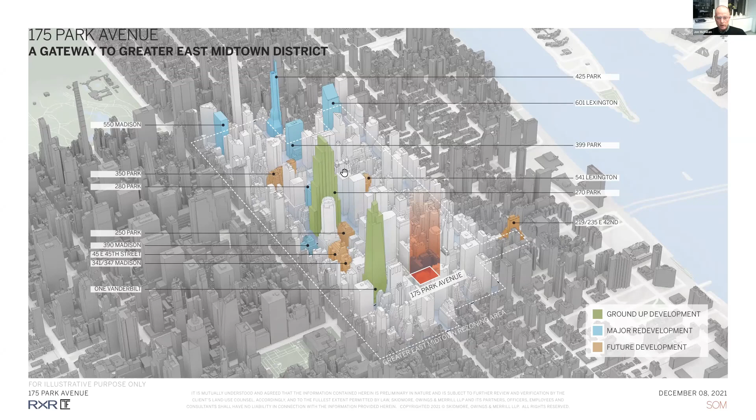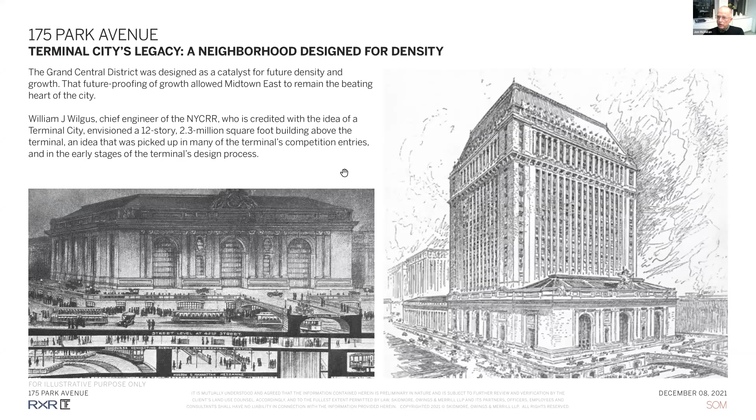So our site is next to Grand Central Terminal, just on the right, of course. Grand Central was always seen as kind of the center of Manhattan's premier office district, a place appropriate for density. And the reason for that, of course, is that it has so much infrastructure built into it on many, many different levels. You can see the viaduct that surrounds Grand Central in both of these images. Then the street level, and then several levels below grade of commuter and subway rail lines. All of that stuff extends underneath our site next door. So we had to kind of deal with all of that from the very beginning.

The site, as you can see, go ahead, Kim. On the left, the site sits at the confluence of both regional commuter rail lines and the city's subway system. So the Long Island Railroad and Metro North coming in from upstate and Connecticut come right into this site and join together with the city's several subway lines, literally underneath our site. And on the right, you can see our site in orange. And then in the middle of that image are the black and white train lines coming in from Connecticut and upstate New York.

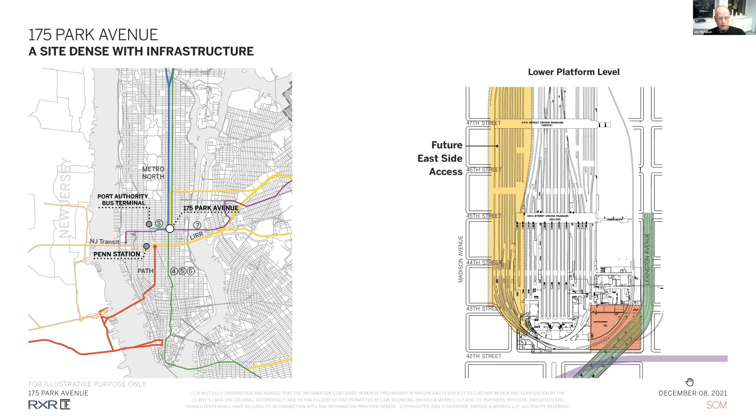Then the yellow lines, these are the new Long Island Railroad lines that are being brought in through East Side Access. And then the green is the 4/5/6 subway line that transitions from Lexington over to Park Avenue, literally under our site, and the station is on that diagonal underneath our site. And then the last thing is you can see that semicircular turnaround rail line is also still in operation for Metro North. So these are all the things that we had to dance around in placing this building on the site. Next.

So this is the site today, the Grand Hyatt Hotel. It was Donald Trump's first project in New York, about 1979, 80, and he acquired the old Commodore Hotel and just sort of slapped a glass skin on it. It's essentially a big H shape that sits on several levels of ballrooms and that sort of thing. Next slide, Kim.

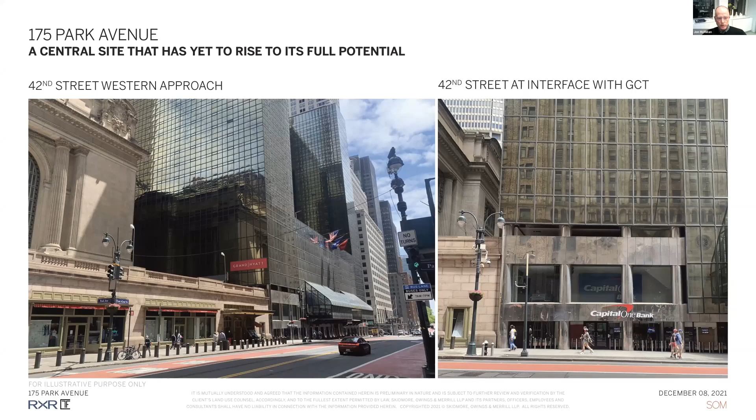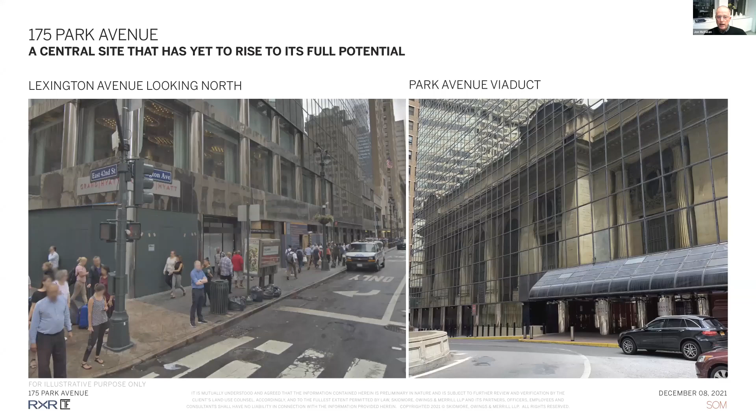It's built out to the property line, no public realm, very much crowds the public realm around the building, as well as all the landmarks that this site is adjacent to. Next slide. So you can see that it's very crowded on all sides of it. On the left is Lexington Avenue. On the right is the viaduct that separates the site at the upper level from Grand Central Terminal. Next slide, Kim.

So this is a scenario of the building. It's about 2 million square feet of zoning footage, much more gross square footage, and about a 500-room hotel that sits at the top of the office building, which is a pretty unusual format for New York City. And then you can see the building terraces back so that we're able to create floor plates of different sizes on each level. Each one of those setbacks is outdoor public space.

And then all of this sits on several levels of public realm and transit improvements at the base. And then you can see the way the building tapers in at the base. That has a lot to do with the structural system that Kim is going to explain, but it also presents the opportunity to create the public realm that you'll see. Next.

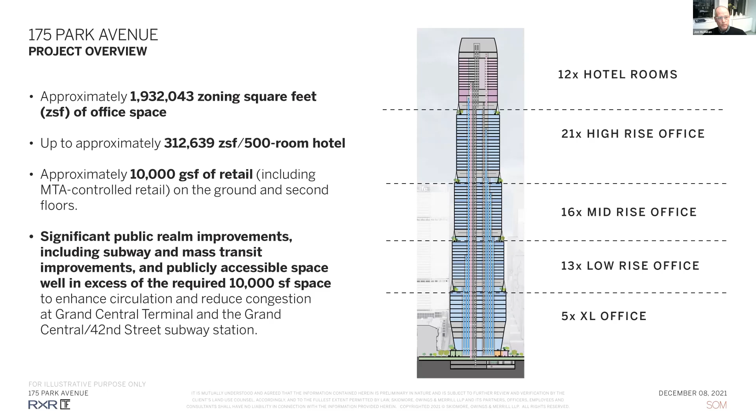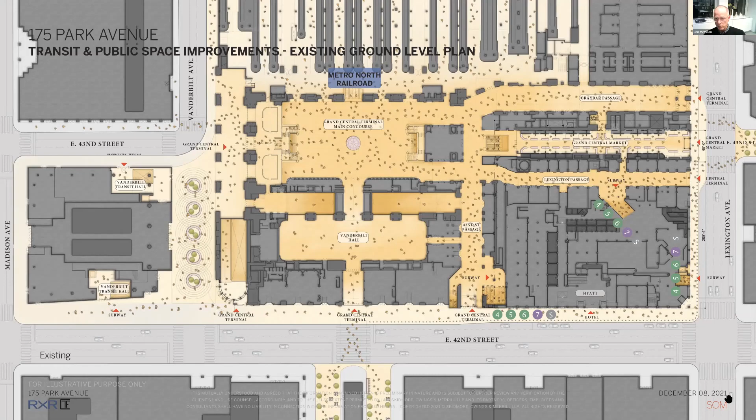Next slide, you can see the ground plane and how we are completely plugged into Grand Central. So that's Grand Central in the middle of the image. Our site is on the right side, and then you can see One Vanderbilt over on the left-hand side, separated by a new public space that's just been opened. But unlike One Vanderbilt, we are plugged into Grand Central. There's no separation between us and the terminal, and many of its circulation corridors literally come through our site, like the Lexington Passage, and then all three of the major entrances into the subway station below cut into our site. So we've been working with all of those.

And by the way, that's such a fundamental part of the project that as we went through the public approval process that we're just finishing here, people really enjoyed understanding the engineering challenges of this site and how that expressed itself in the architecture of the building. And I think that's one of the reasons why we had good success in the public approval process, because people just got what this building was about and enjoyed understanding it.

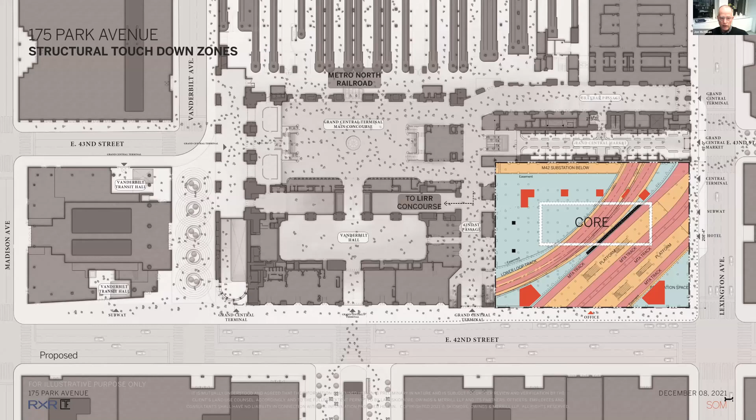Next. So this is the proposed ground floor of the building. You can see all along the left-hand side of our site, we've created a new transit hall that is adjacent to that crowded 42nd Street passageway I showed you earlier. That transit hall leads you into a new at-grade foyer for the subway station below. All the turnstiles that are now on the mezzanine below, clogging up circulation space, have now been brought up to grade. There's a new entrance into this subway station directly from 42nd Street.

And then we're completely rebuilding the Lexington passageway where it is today, but at a much taller scale. And then we're adding a completely new subway entrance, what's called the R239, that is on axis with that subway station below, that's all turned at a 45-degree angle to the site. So that very much improves the legibility, because that subway station entrance is now in line with the station below. So it helps you to understand it better when you get down below.

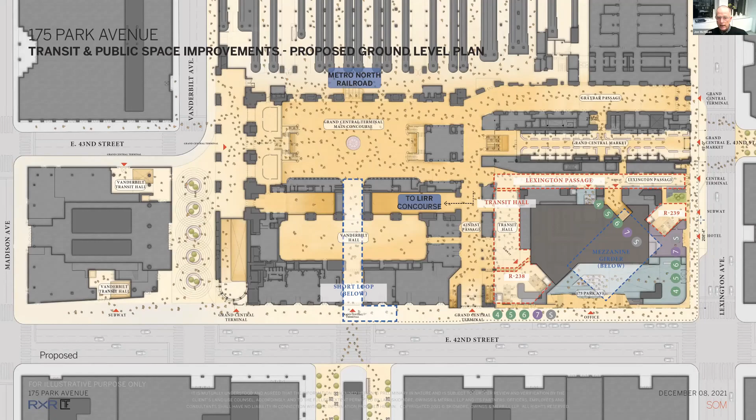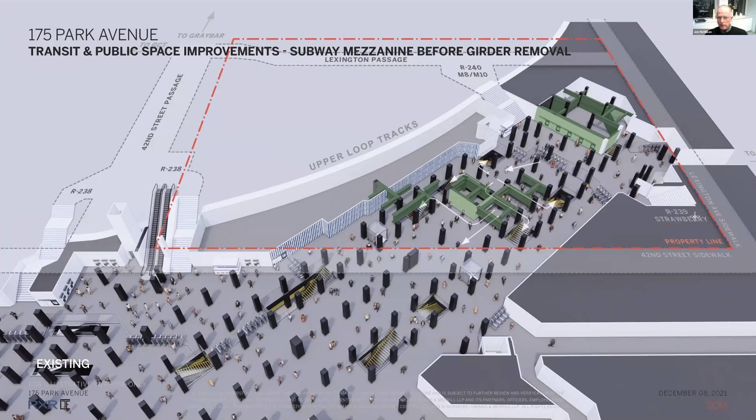And then the next slide shows you the improvements below grade. So now we're at the mezzanine level. Site is still outlined in red, and all of the green stuff here is structural girders holding up the old Commodore Hotel. And because the subway station is built on a different grid than the building, these are all transferring the structure from one grid to the other. We are going to be able to remove all of that; all of this is causing congestion and chaos in the subway station. People can't find the staircases. They don't know where they're going. So we're able to lift all that green stuff out of there. We're also able to remove all of the turnstiles that were clogging congestion before.

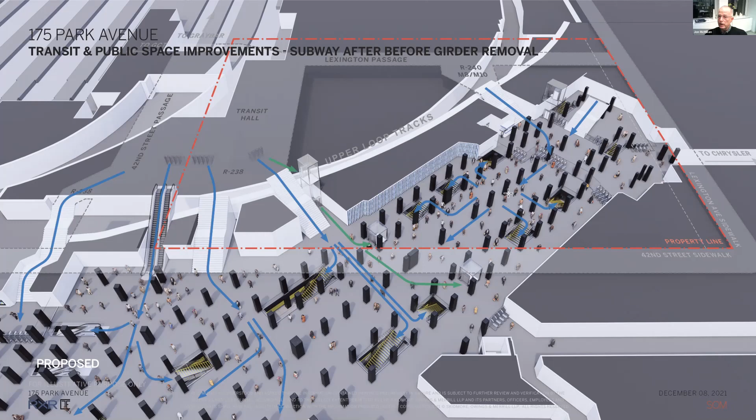And you can see where this new subway entrance is coming down with the green line. That's a new staircase, new elevator, taking people into the middle of the station, so they're now evenly distributed throughout all of those staircases. And then off to the right is the new staircase at the end of the axis of the station, taking people up to Lexington Avenue, also bringing daylight. Both of these entrances are now bringing daylight down into the mezzanine level.

Next. And then we reached off the site to make improvements, and we found a way to make use of abandoned rail tracks and some old storage room, so that we were able to create a direct connection from the Metro North line and from the new East Side Access line into the mezzanine level of the subway station. Right now all of these people have to go up into the terminal and then come back down through those crowded subway entrances. So we're going to be able to take about 4,000 people per rush hour out of those subway entrances and bring them directly from the regional rail lines into the subway system.

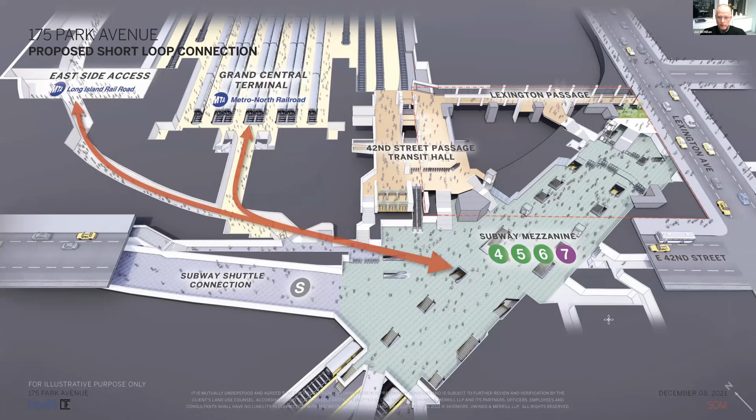Next. So here is a view of the transit hall that we're creating. We do have the opportunity to introduce skylights that will bring natural light into the transit hall, and we've been able to align those skylights in a way so that they will open up architectural features of the eastern facade of Grand Central Terminal.

One of the controversial things that we've dealt with as we went through the public approval process was whether or not this wall between our transit hall and the 42nd Street passageway should be completely open so that the two spaces are joined, or should we preserve the regular entrances that Grand Central has and maintain the distinctiveness of the historic 42nd Street passageway. And the historians seem to come down on the side of maintaining the distinction of the 42nd Street passageway. So that gave rise to this rhythm of entrances that are aligned with other rooms and other entrances like Vanderbilt Hall within Grand Central Terminal. Next.

So here is a cross-section through that transit hall, and because we are pulling our building back from the property line, we are able to create this open space around the site, and that's where this section is taken, so that we now are able to pop up these skylights, create views of the eastern facade of Grand Central Terminal, and introduce this new public realm at an elevated level that Kim and Adam are going to take you through a little later.

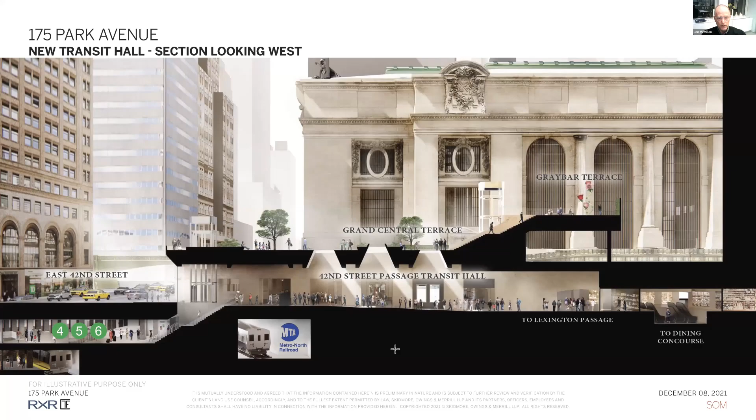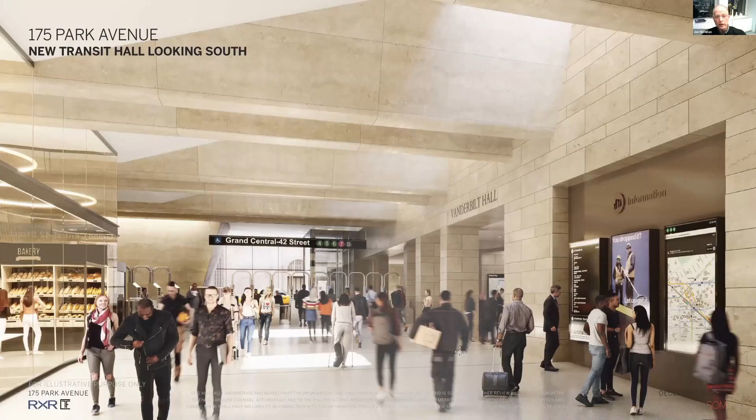Now we are in the transit hall looking south towards 42nd Street. So we're bringing light in through this new opening onto 42nd Street, and you can see all the turnstiles have been brought up from the mezzanine below and are in this transit hall now.

We think about half of the tenants of the office building will come in through this entrance directly from Grand Central Terminal. And because of all of that transit infrastructure underneath our site, we can't bring the elevator pits below grade. So it's one of those buildings where the office lobby has to be lifted up above grade because of that constraint below grade. Next.

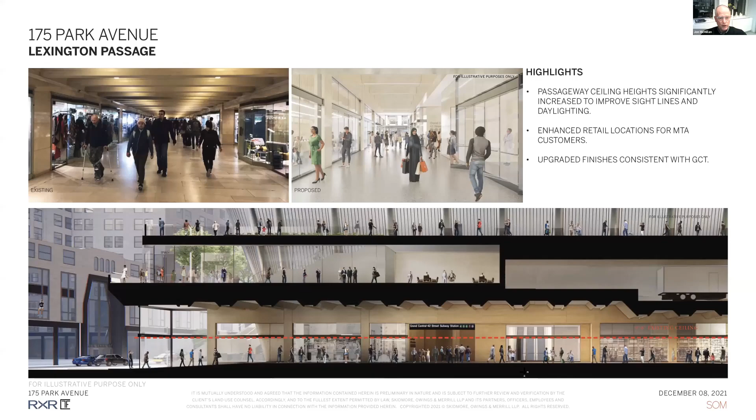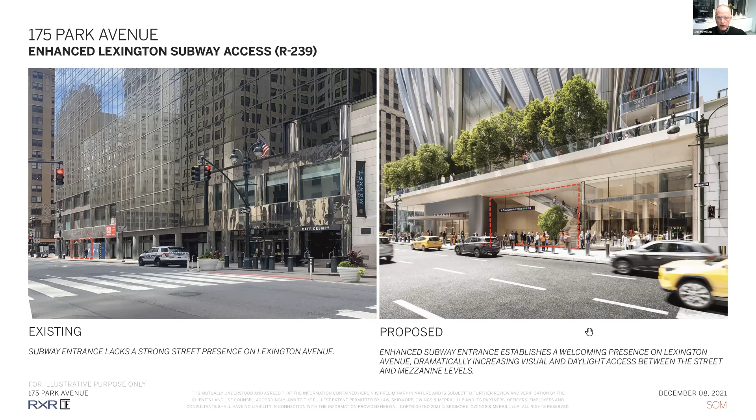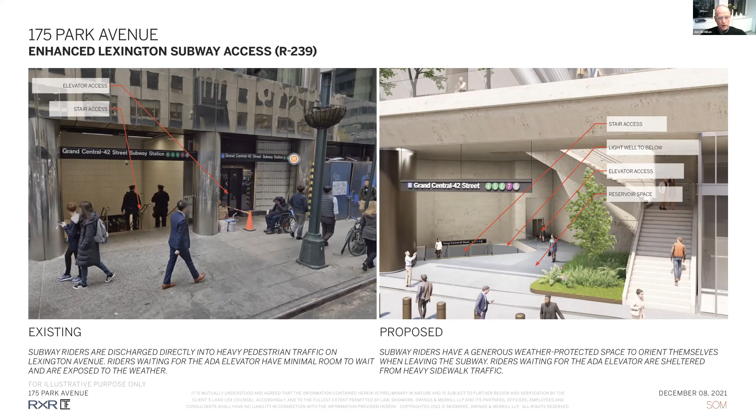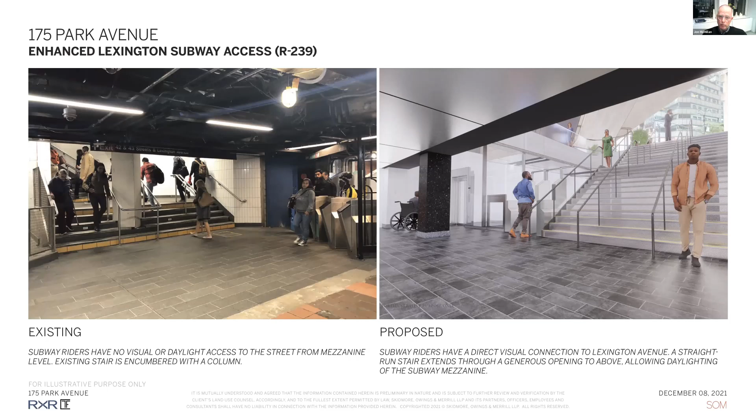Next. And then inside, this is the new Lexington Avenue entrance that we're creating on the right. And then on the left is the existing exit that takes you up into the Lexington Passage that I believe the MTA has just improved. That will remain in place, and we're just going to add the new entrance that you see here on the right. And then next. And now I'm going to turn it over to Kim for some architecture.

Thank you, John. Great. So this gave you a sense of all the opportunities that we saw to leverage our site and add benefits to the larger transit system. And so obviously now we have to walk you through what the building is that sits on top of this.

And first and foremost, we wanted to start off with pointing out the extraordinary context that this building is sitting in. It's basically surrounded by great landmarks of a variety of architectural expressions on all sides. And so that was really a big influence in how we responded designing the building, as well as creating opportunities to improve the public realm, not just the transit that John just talked through, but on another aspect.

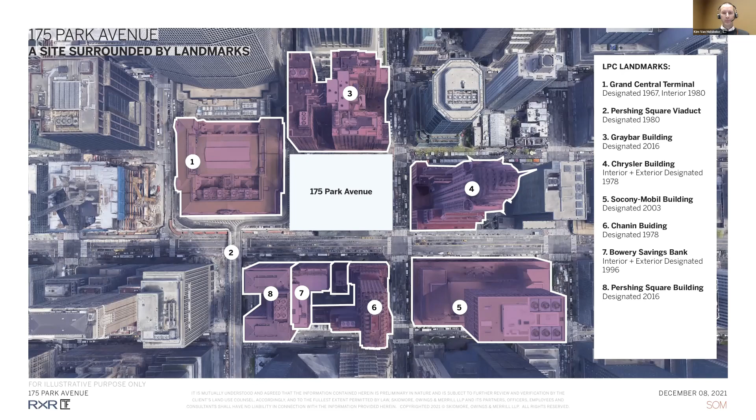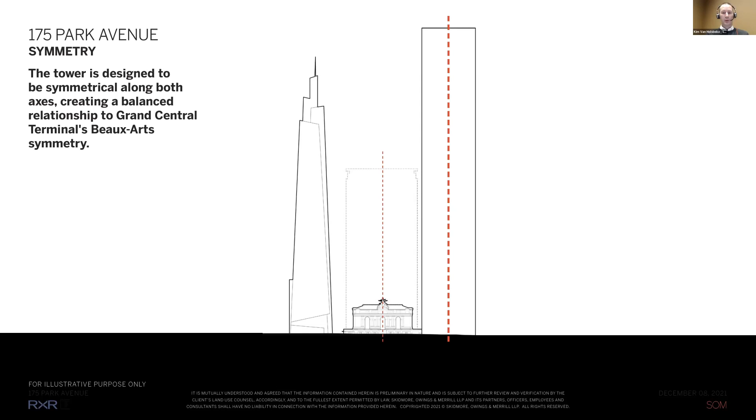And so first of all, symmetry was really key in how we looked at this building because of the context and because of our direct adjacency to the Grand Central Terminal, the Beaux-Arts building that is very much organized around symmetry throughout the planning and the elevation.

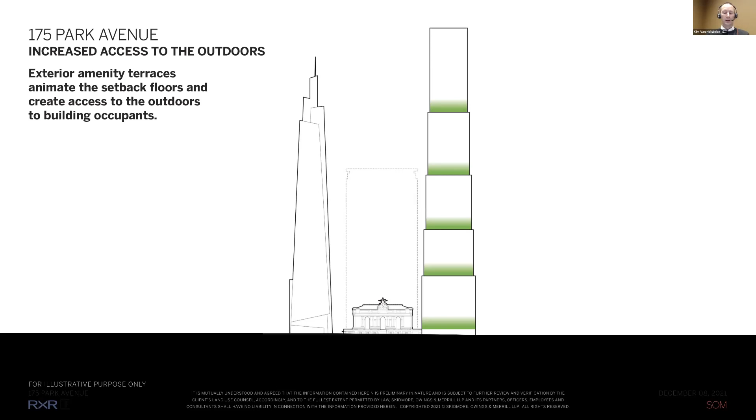Secondly, as with all New York buildings, we wanted to really tie into that vernacular of architectural towers with a classical setback rhythm that allowed daylight to reach down to the street and the adjacent buildings and landmarks, and then also leverage those setbacks, in the current workplace environment, to create opportunities for either tenant or public outdoor spaces. So see the ones in the tower, opportunities for the tenant. The one at grade there at the viaduct is where the opportunity really lies in transforming the public realm for open space.

On top of that, the tower is really expressed through its structural system. We really felt strongly that this is not a glass building, like the West Side has a lot of. In this context, with so much architectural expression and materiality, we wanted to express the structure as an outboard element that created depth, and then the metal expression of it brought material to the building.

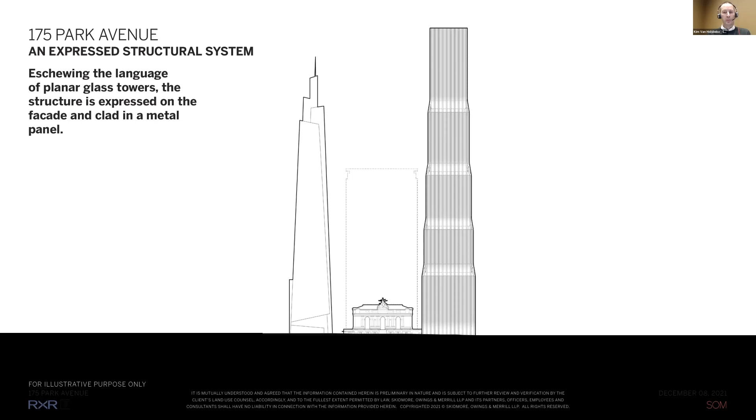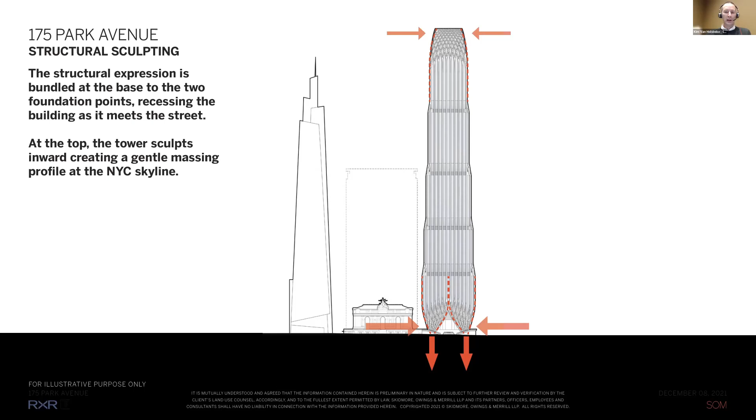That structure that then became the DNA of the building had to terminate at the top and at the bottom. On the bottom, really tying into those site constraints that John walked you through of where the structural elements can come down and tie into the bedrock. And at the top, how it terminates, since it's a very tall building, and how it's contributing and registering in the skyline. And so that expression of an external vertical system of columns, its bundling at grade and its weaving at the top, really became the highlights of the identity of this tower,

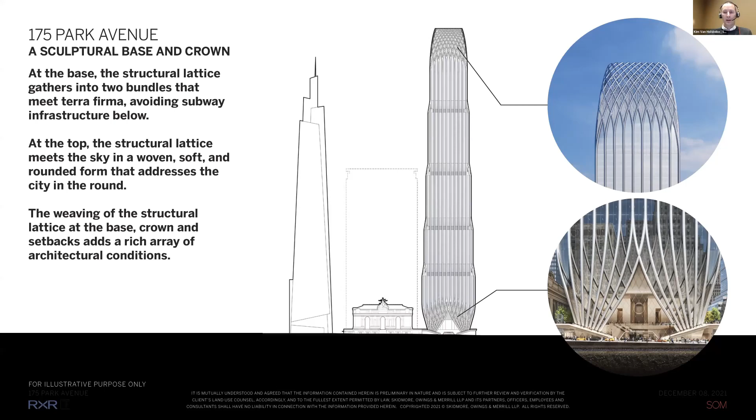really resulting in an addition to the ever-evolving skyline of New York, which is really part of what New York City is about, tracking back the last 100 and 150 years. Every decade, there's a new addition, a new changing element that contributes to that beautiful skyline that is known around the world. But it also tied into creating new office space within the historical Midtown business district that meets the needs of the 21st century workplace, and positioning Midtown in that larger worldwide competitive landscape.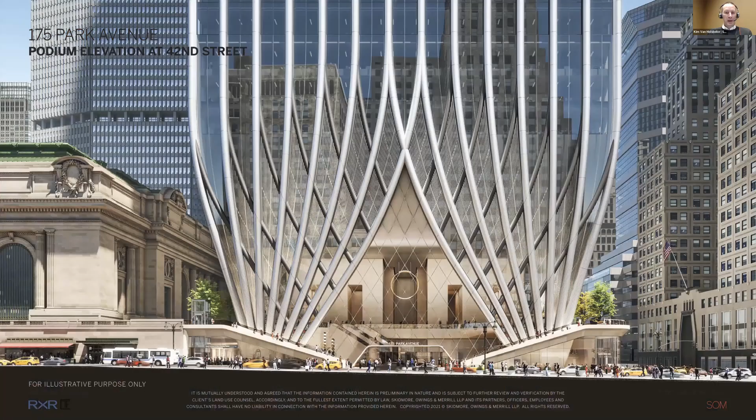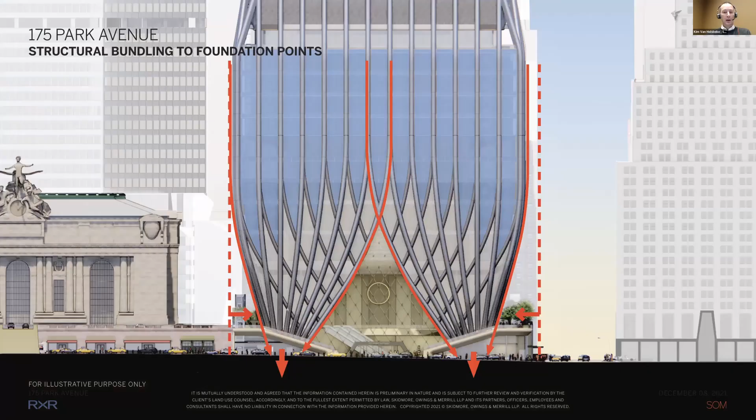At the base, the building really bundles to those structural elements, but it was also an opportunity to create scale and definition and texture to the street wall. As I mentioned, it was defined primarily by where the touchdown comes down. It forced us and created an opportunity to pull the building inboard from the property line, creating more space between our building and our neighbors at that critical street level. And then that brought the opportunity to create new publicly accessible space.

The weaving of the structure as it comes down to the touchdown points is then tailored to relate to our neighbors, either the setback of Chrysler or the crown or the statue of Grand Central, and really get another layer of texture and scale that's appropriate to create that New York City street wall expression before it meets the ground.

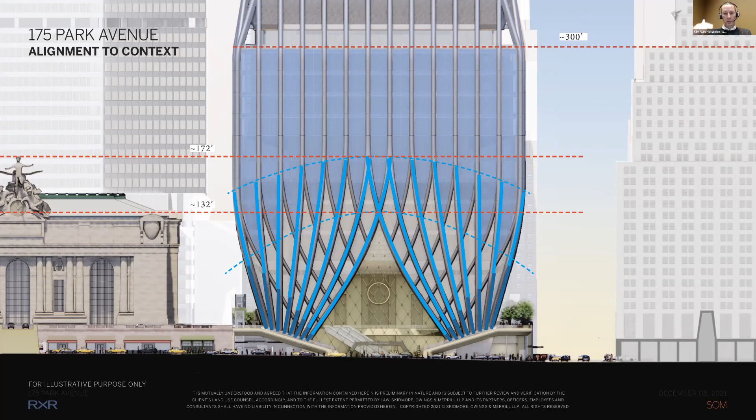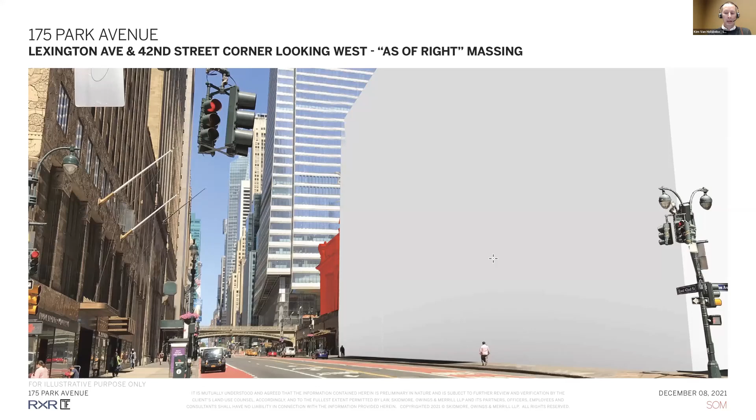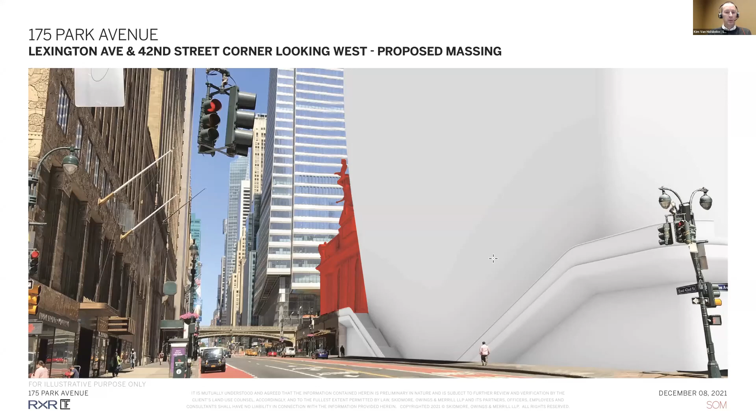But our solution, driven by the structural constraints, by pulling the building in, allowed us massing-wise to reveal Grand Central from this critical intersection, and not just reveal it, but allow these great windows that will provide see-through views to the eastern facade of Grand Central for the very first time from 42nd.

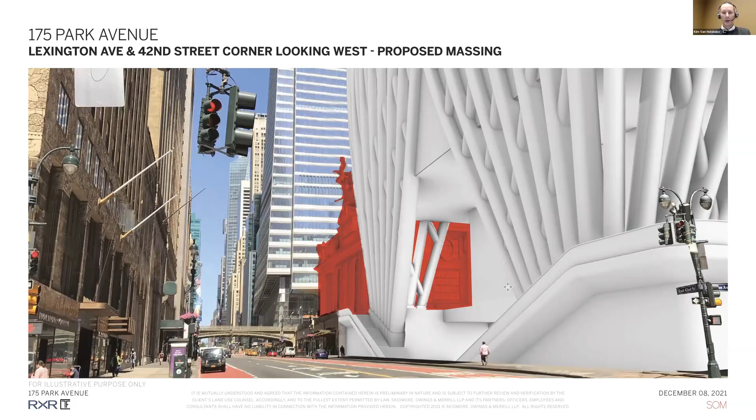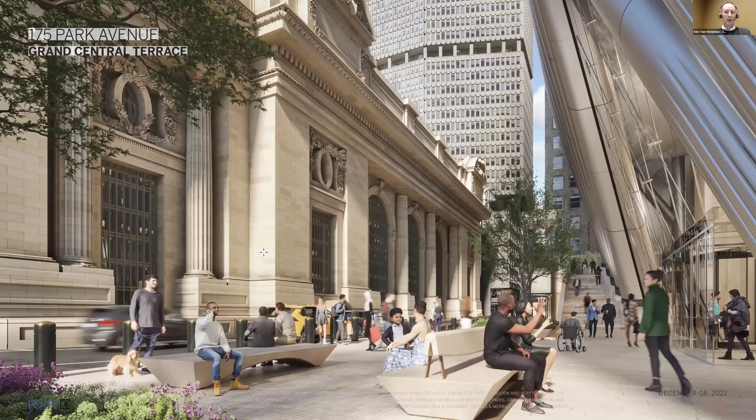It allows us to create that new outdoor space on the west side, right next to Grand Central Terminal on the viaduct level, and creates an opportunity for the general public to come up close to the Grand Central Terminal architectural expression.

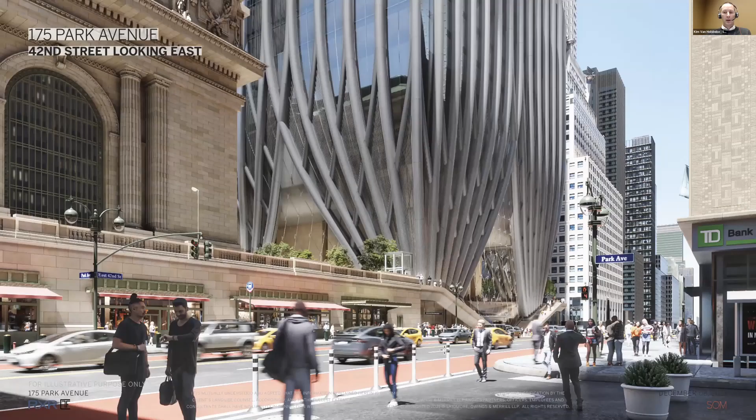Here a view where we're standing at the Park Avenue Viaduct Bridge right behind us, looking east. In a similar manner, the building pulls back, creates more breathing space, as well as starting to see through views towards the Chrysler building. And on the corner here, again, our building pulls back, revealing the Chrysler podium and Lexington much more open.

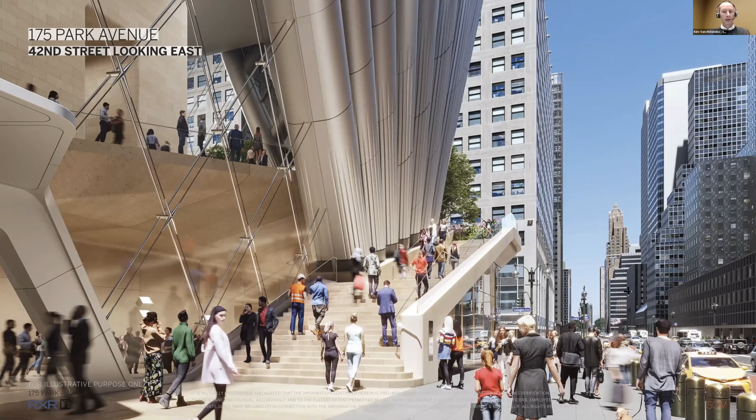And as I mentioned, that public space created at the viaduct level on the second floor is really tied back to the 42nd Street pedestrian traffic. Two grand stairs flanking the entrance come down to grade and create a very gentle and inviting staircase up to those two terraces, and seeing greenery or Grand Central, depending which side you're looking at, is really your visual cue of what you're going to find there.

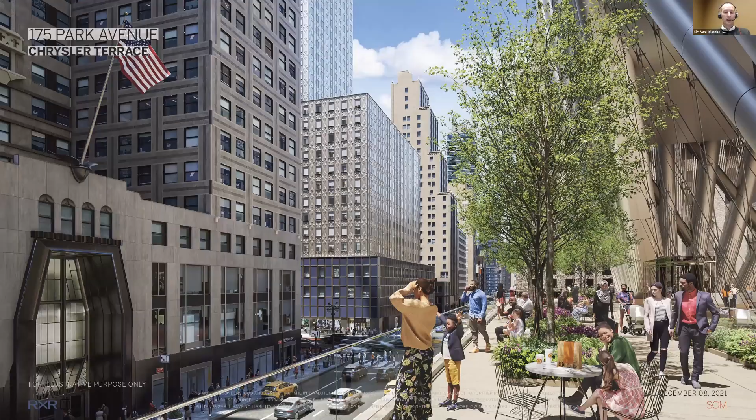The Chrysler Terrace on the east side of our building overlooks Lexington. You kind of are elevated above the hustle and bustle that this Midtown corner really has. It creates a place of repose, quietness, lush trees, and a point of overlook where you really, for the first time, can appreciate the Chrysler building's entry and facade in a quiet moment.

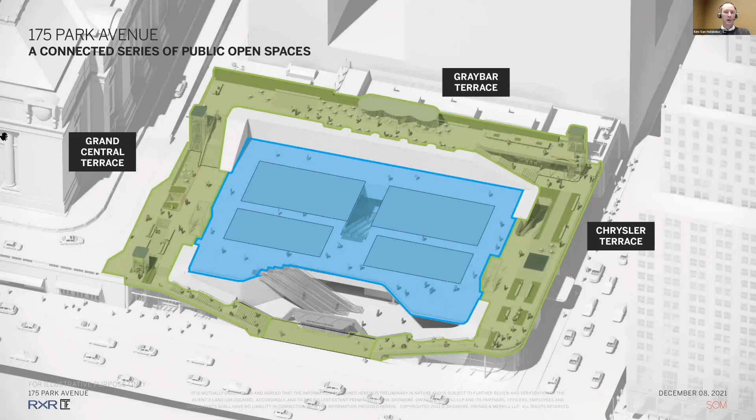As you can see, the challenge really became an opportunity for the building, for the public realm, the transit, and the public space. This very unique public space is a connected series of outdoor spaces that are tied back seamlessly to the pedestrian street level. Chrysler to the east, Graybar to the north, one level up, and then back down to the Grand Central Terrace, which is adjacent to the new facade exposure of Grand Central, and then back down.

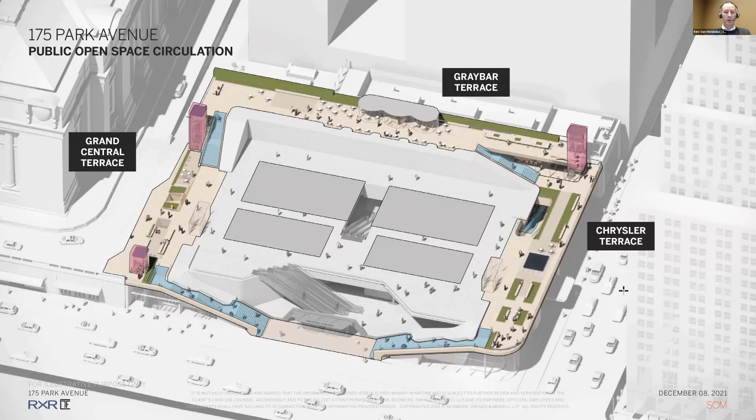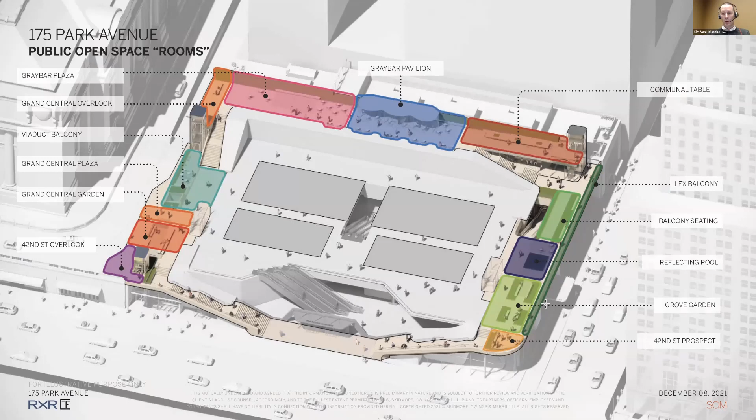The space itself is not just a space to look at these great landmarks all surrounding it, but is also programmed through a series of rooms, some more focused on viewpoints to the landmarks, some more focused on being able to sit and relax and just enjoy the moment under the canopy. Adam will go into much more detail on all those particulars. And then intertwined into this circuit of public spaces, an idea of culture, art, and activities will be planned throughout the space.

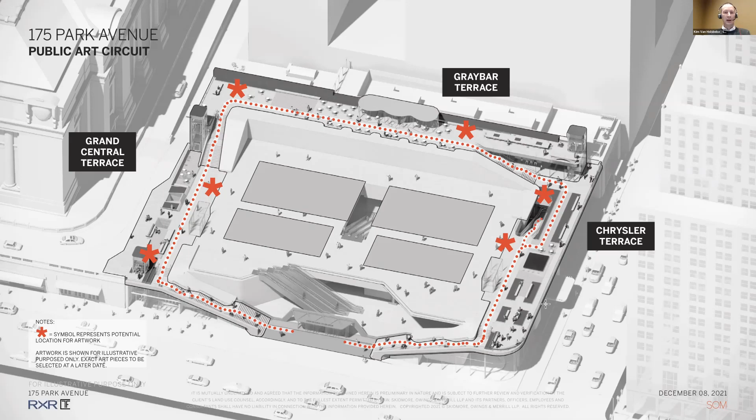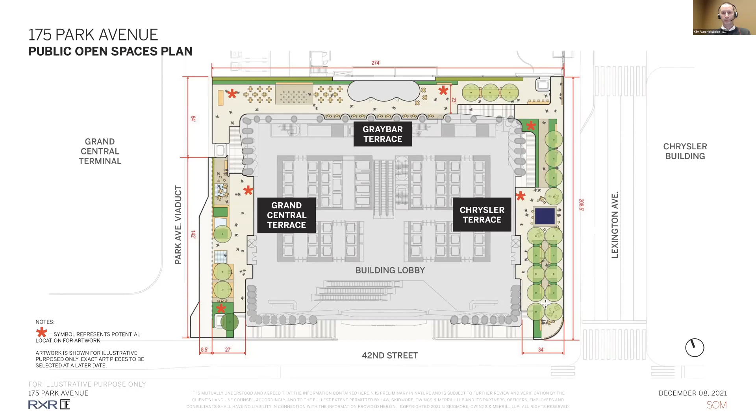And really culminating, which was as a baseline a requirement of 10,000 square feet of public space on a site footprint that is only 57,000 square feet, we were able to leverage the site in addition to all the transit to accommodate about 25,000 square feet of publicly accessible outdoor space, which when you look at it on a site of 57 is an amazing feat. And we're very excited about that. And that all tied to the natural street level and the natural flow of people.

And with that, I'll hand it over to Adam, who will walk you in much more detail about all these qualities. Thanks, Kim. I think it's an amazing overview and introduction to what the public open space is. And so I'll try to dive a little bit into it, but just to dwell for a moment on that last statement, a half an acre of public open space at this location in the city is just something that we feel is a tremendous public benefit.

And it's not only a public benefit, we think it's a tremendous differentiator for the kinds of tenants and the things that people are looking to in the future when they look to where they're going to want to be in an office building. And so for the public realm, we took an enormous amount of care in delving into this. So I'll jump in a little bit more detail on these terraces. If you go to the next slide, please, Kim.

So Chrysler Terrace, as Kim mentioned, is the largest. This is about 10,000 square feet of that 25,000. And it was programmed with high canopy trees, fixed and movable seating. And the general intention here is that these are the social spaces that can encourage interaction. If you could go to the next one, please.

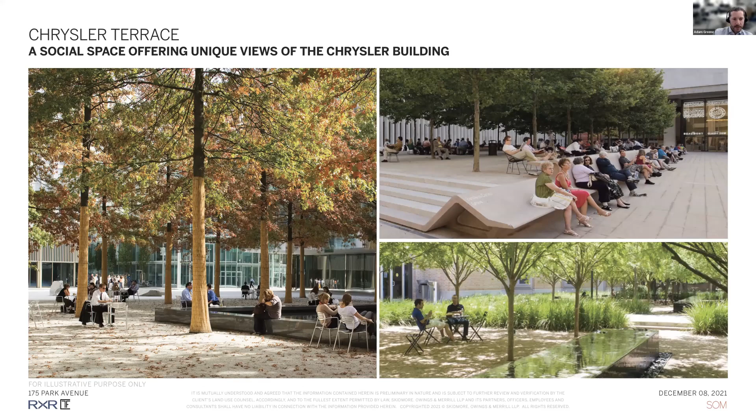We take advantage of that scale, that 10,000 square feet along Lexington. You can see on the plan here, the terrace is anchored with a large grove of trees to the east. You can see moments of overlook all the way on the corner there. And these trees lower the scale and give people in the terraces shelter from the sun and wind.

At the center, there is the reflecting pool that's on axis with the center of the Chrysler Building that sort of draws that relationship in from across the street to our building and is directly visible from our lobby. We think the entire experience of being in a building lobby and being surrounded on 3 sides by public open space and then across 42nd Street with the incredible landmarks is something else that's entirely unique. Next slide, please.

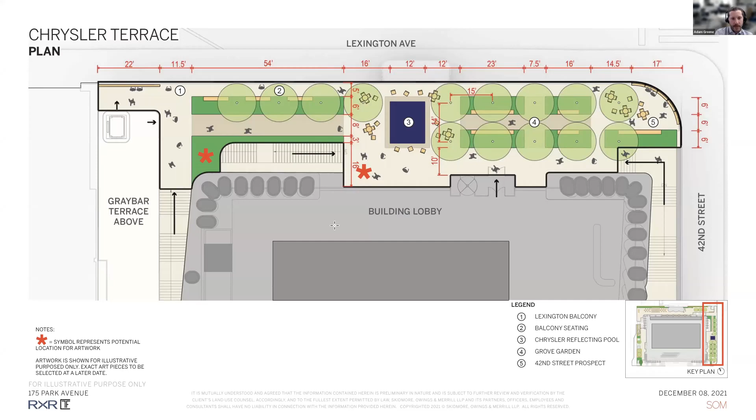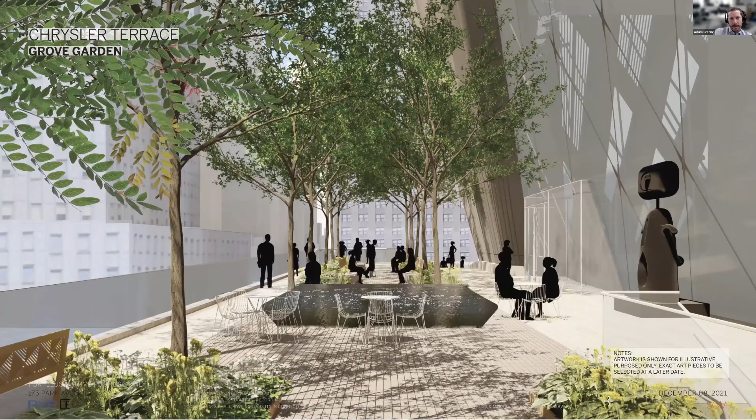You're moving north. Here you're looking south. This is that stair that comes up from Lexington. You start to see again the variety and design of the types of spaces we're creating, even with the furniture. So that's another thing that's very important to us, is that there's a real scale and texture to this that is changing.

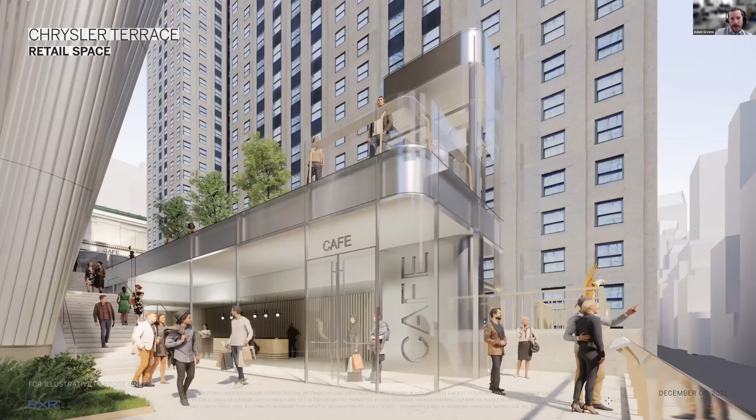If you turn around and go to the next slide, now you imagine facing to the north from the same location. You see the stairs on the left that take you up to what we call the Graybar Terrace. That's the one across the north side of the building. And then there's a small cafe that's nestled in the back that also would connect into the lobby.

Now the next terrace is the Graybar Terrace. This is this dynamic connector, we call it. It's a circulation. It's another 15 feet elevated above the terraces that are the Chrysler Terrace in the east and Grand Central in the west. So it connects them, but it also offers opportunity for programming. It has the most flexible space in that respect.

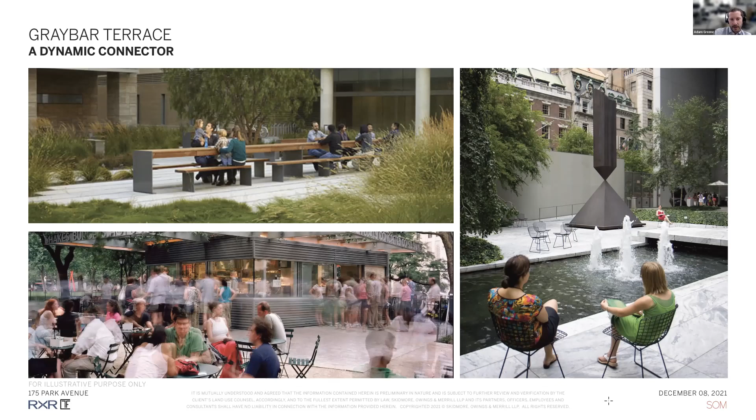So the plan of this, if you see on the next page, again, we're north at the top of the page. All year long, there'd be a concession that would activate it in the middle. You can see that pavilion that'll be sculptural in design. To the east, again, there's another overlook, and Kim was highlighting the communal table there under those 3 trees, which again, I'll get to in a minute, the cultural programming that was a big part of how we're thinking about this, the art and cultural programming.

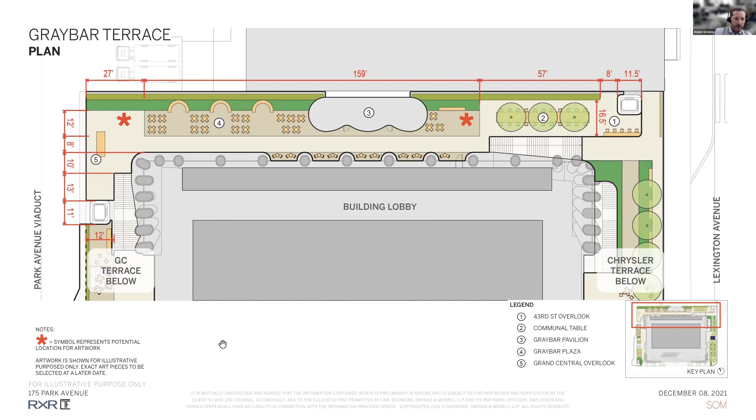We thought about different elements that could become pieces of public art. They could become places where there's communal gatherings. That's there on the east side. And then on the west side, it's a little bit more flexible, with some fixed seating along the north, but also movable seating, so this space could transform and be used for many different activities. On the next slide, again, this is that overlook looking south over the cafe and over the Chrysler Terrace.

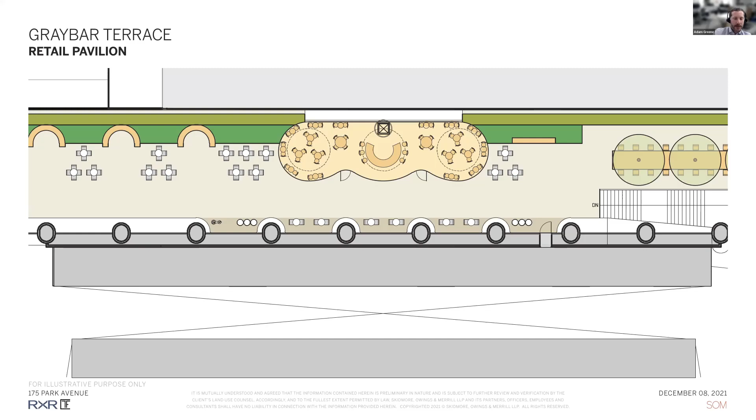To the next slide, just zoomed in again, you see that small sculptural pavilion, the flexible zone on the left and the fixed zone on the right. On the next slide, you can see what this looks like from the top of those stairs looking west towards Grand Central. Again, these art pieces are placeholders. We're really looking forward to the process that we'll go through with the Public Art Fund, who we've brought on to work with us on this to select the right pieces and really write a brief and commission site-specific work for this space. Go to the next slide.

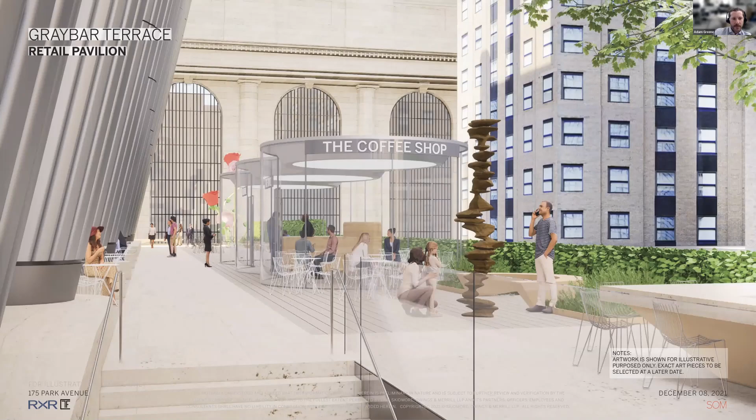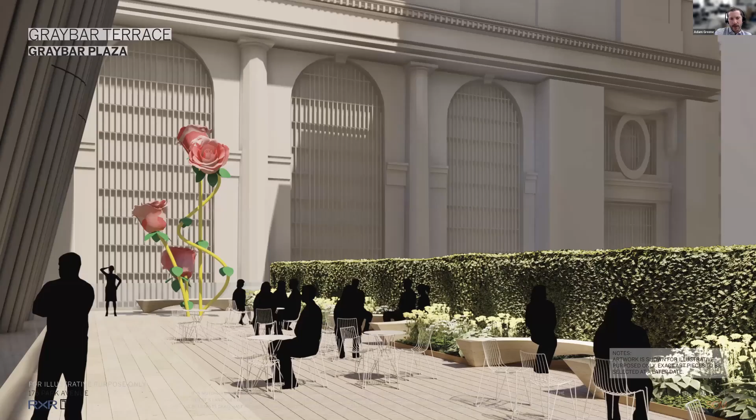And one of the things that we went through as we went through our entitlements, you can go to the next slide, Kim, just because it's a beautiful image, is we spent a lot of time doing outreach. We spoke to 47 cultural organizations over the last 6 months, and as we started to think about how one would program, how one would activate, we realized that the variety of the spaces themselves, if you remember back to the axon Kim showed with all the little different rooms broken down, the scale of these spaces is unique and it lends itself to many different types of programs.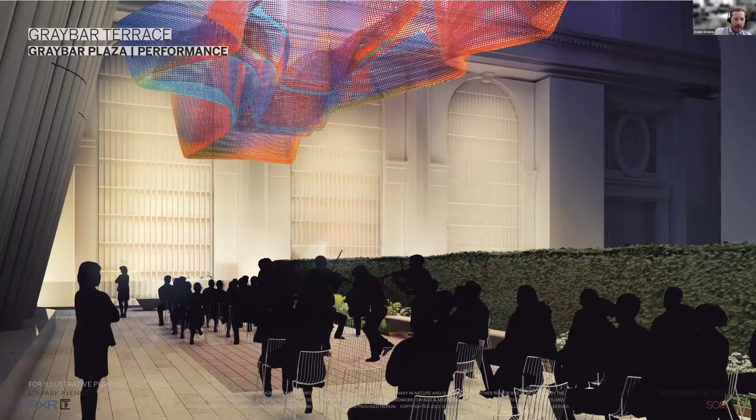The next space is the Grand Central Terrace. And this is really designed to capitalize on those views that Kim mentioned, the eastern side of Grand Central, which nobody really experiences right now because it's the awful view of the Hyatt on the right to the east, and then the beautiful view of Grand Central to the west, but there's no pedestrian access up there, so you're just moving through in a car.

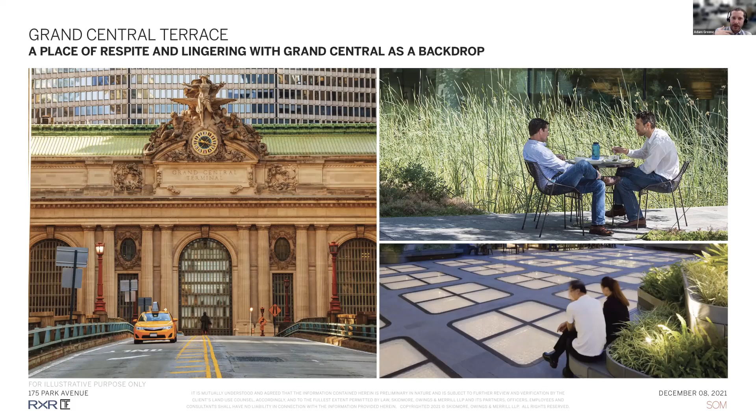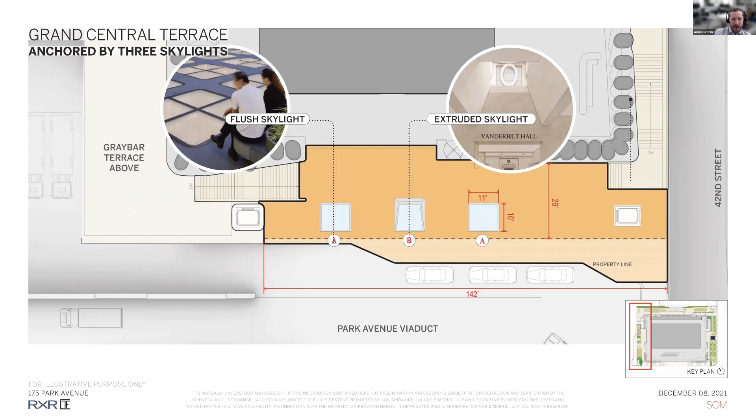If you go to the next slide, please, you can see that the terrace is really anchored by those 3 skylights that John referred to in the beginning when we were speaking about the transit hall and bringing that light down below. There's 2 flush skylights and 1 extruded skylight that really characterize this space. On the next slide, you can see that plan. It's smaller than the others. It has much more intimate and smaller scale seating zones. Again, you see in the center of the plan, access off the lobby.

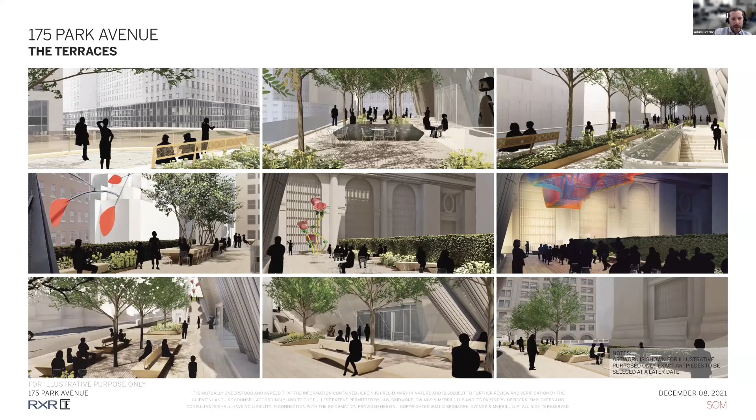And it's been just a tremendous experience, I think, for all of us to work through this with Field Operations as they've brought all of these different design ideas to life through the experimentation and the programming and looking at how it would really function through a lot of their experience. On the next slide, I think we've seen these renderings before. It's another view of that.

And then following again is just a recap of our partners. I think that what's extraordinary about the Public Art Fund is their belief that art should be available for everyone and free, and that the city is really a canvas and a platform for artists. And so there's a really important element of civic dialogue that we'll be able to work with them to apply here. And then again, with Lord, I talked about the real programming opportunities.

So to wrap up the next section, which I'll jump into past this slide, Kim, we're really thrilled about this project. Both organizations, RXR and TF Cornerstone, and really SOM, have deep roots and commitments to New York City. And I just wanted to talk a little bit at the end about our view on why New York City is the best place to be in the world and our belief in New York City's resiliency.

So this is a little bit less of the beautiful design talk, and these slides are not nearly as pretty as what we just went through, but I wanted to go through some data. And this is from September. So this is all post Delta variant, but not really factoring in the last couple of months and any situation we're looking at now with Omicron, but hopefully that doesn't really set us back.

So I think what we wanted to highlight here is that the world's knowledge-based companies really recognize that they must have a presence in New York City in order to attract the best and brightest talent. This city is the largest in the United States. It's the second largest metro economy in the world. And New York City has a diverse economy in that we aren't focused on one industry, right?